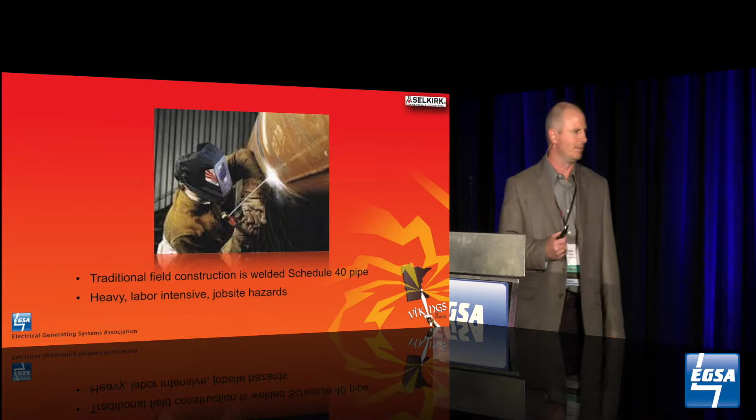So kicking into this, if you're not familiar with our product, we're at the tail end of the system. Here's my engineering humor again, but we're not depressed about it. So typically, exhaust systems, this is at the very end, the tail end, is a heavy Schedule 40 carbon steel pipe. Very common practice, been for years.

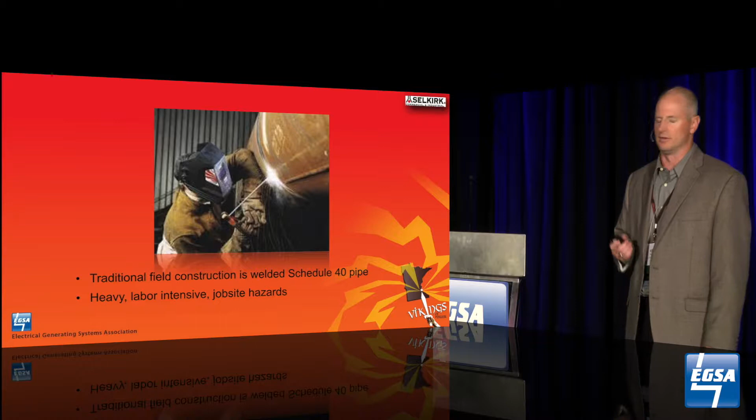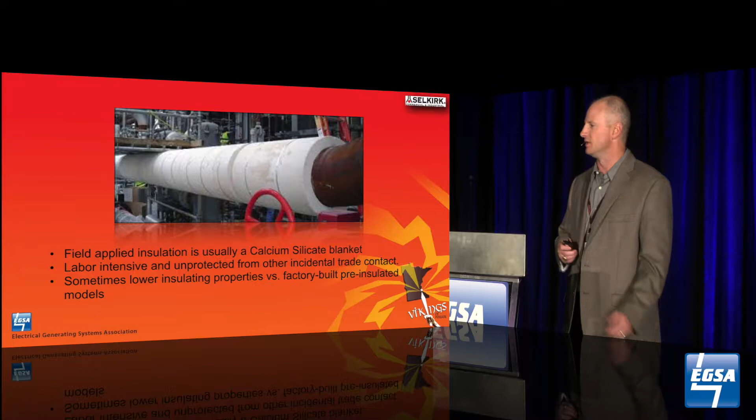But with that comes a lot of disadvantages. Field welding, for one, is a main concern. A lot of hazards can happen with that on job sites. Additionally, you've got field wrap, calcium silicate wrap. Does its purpose to some extent, but not overly protective of itself. Can also be an additional field, intense labor type of operation.

So when you look at some of the perspectives, the advantages are really just that it's a readily available system, carbon steel, Schedule 40 thick pipe, economical, readily available sizes. But there's a lot of disadvantages as compared to a UL listed system.

And the oxidizing environment that exhaust gases create, especially if it's an outdoor system like that one, those sulfur infused fuels will eventually corrode that out, especially outside. So you have larger clearances to combustibles.

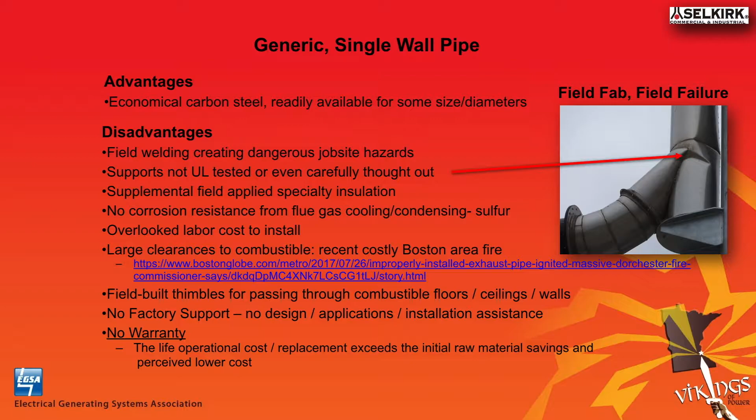Case in point, earlier this year there was a Boston fire that happened. They were on site, again, welding. Well, part of it was welding, part of it was just not keeping clearances to a backup generator for a building. Thankfully there was no injuries. It was not occupied yet, but it actually caused quite a bit of damage to this given building because the clearances were not taken into consideration on the single wall.

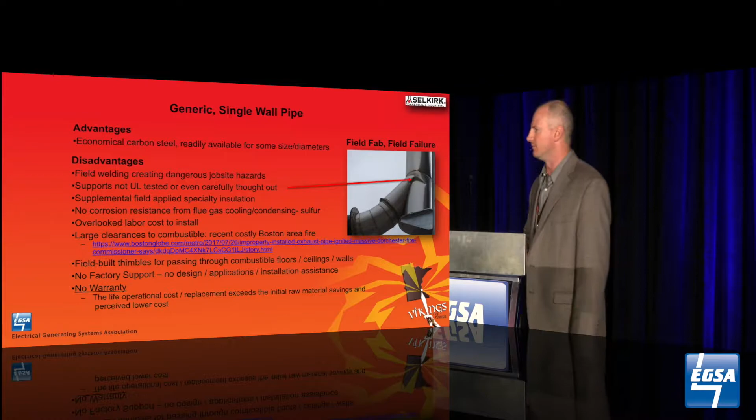No field-built thimbles, no factory support, and there's no warranty. So with UL-listed systems, we offer a full support program with that, design assistance, and then the overall life expectancy can be quite credible.

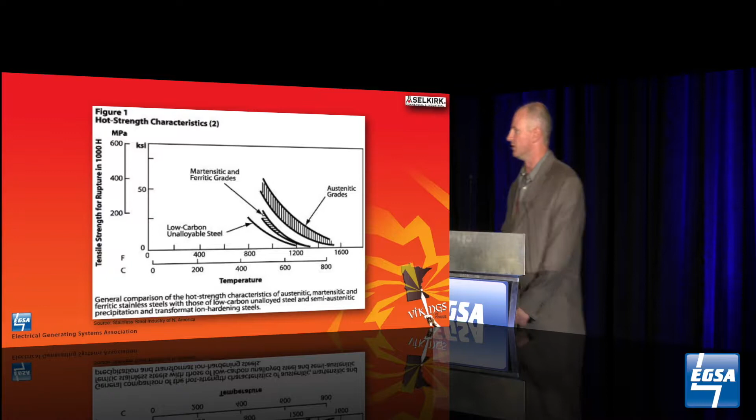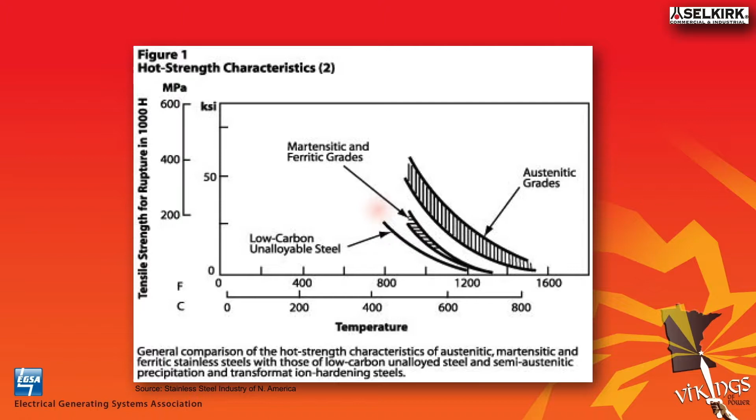When you look at the hot strength characteristics of carbon steel versus stainless steel, which is what you'll find out soon enough are the factory-built systems, there's almost double the tensile strength with austenitic stainless steels versus low carbon steels at the higher temperatures, anywhere from 800 to 1,000 degrees Fahrenheit, or even up to 1,200 on some of the gen sets.

A little quick ad. We did pros and cons, of course. Just going through some of the bullet points: stainless steel, pre-insulated, durable, credible, clean look. Life goes on.

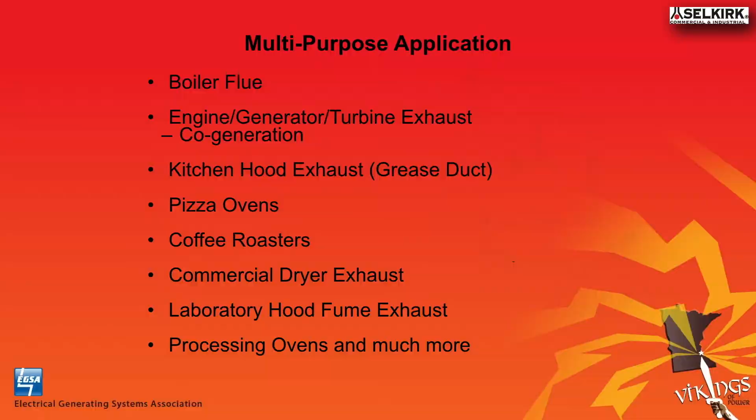So where this all came from, UL listed systems originally started out with boiler flue back in the early 70s, aka pressure stacks, and then eventually evolved into use on generator exhaust, turbines, eventually even into kitchen hood, grease duct world, pizza ovens, and the list goes on and on that we get uses for.

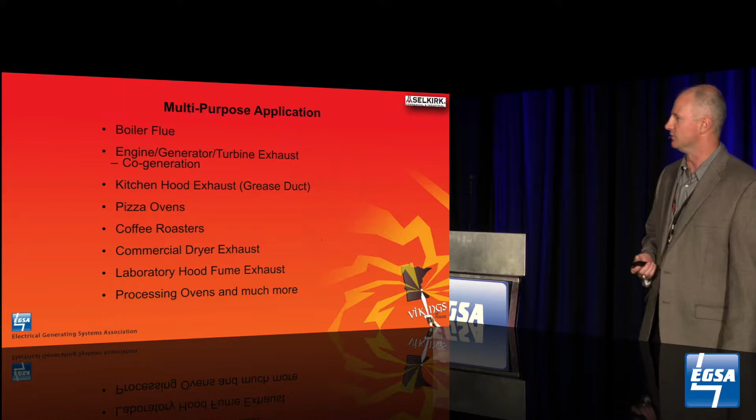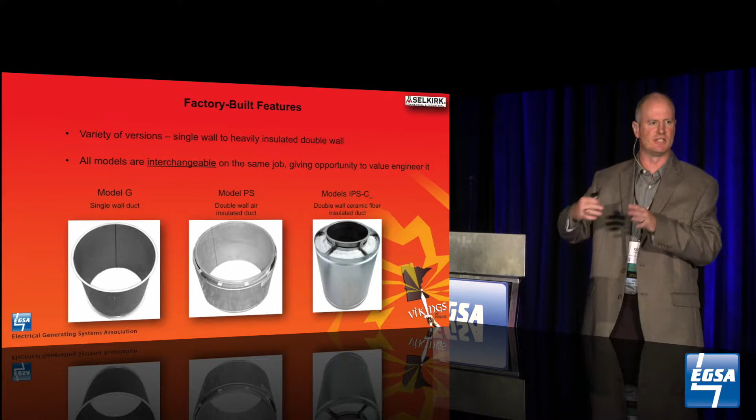We have a variety of options, starting with single wall to a handful of different double wall options. Again, all pre-insulated, stainless steel. The models are interchangeable, so you can start with one particular style in one area and maybe increase the insulation in another area in a building if you've got more concern with safety and clearances.

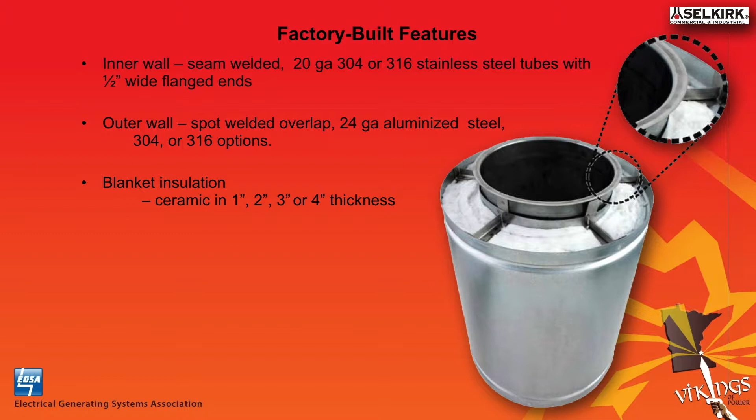So getting back to the guts of these systems, they're 20 gauge stainless steel. We usually use a 304 or 316 grade. Outer walls are usually anywhere from a 24 gauge aluminized steel, which is kind of like a galvanized look. It's paintable, and then there's a 304, 316 option as well. And then the blanket options are anywhere from 1 inch blanket all the way out to 4 inch.

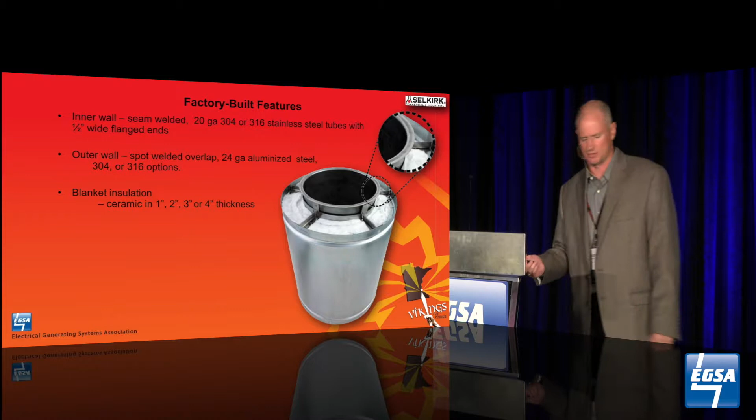Typical joint assembly, as I said earlier, is modular. These are a band and caulk type of system. So various lengths, various fittings, elbows, T's. Basically, you put the high temperature caulk in there, and then that holds a 60-inch water column pressure, suitable for the generator back pressures that we see in the industry today. And then you close the joint up with the trim pieces and insulation if necessary.

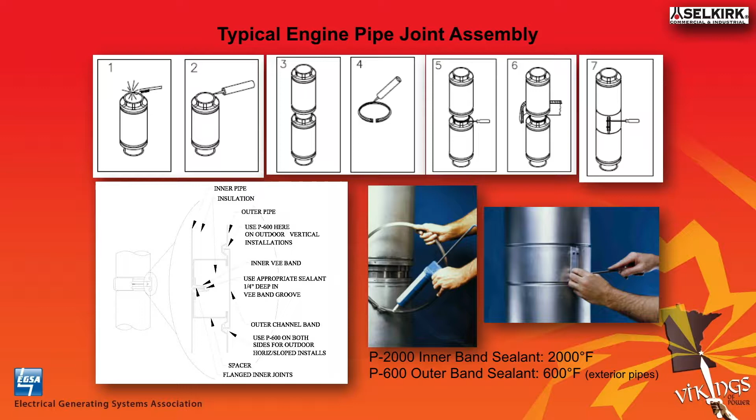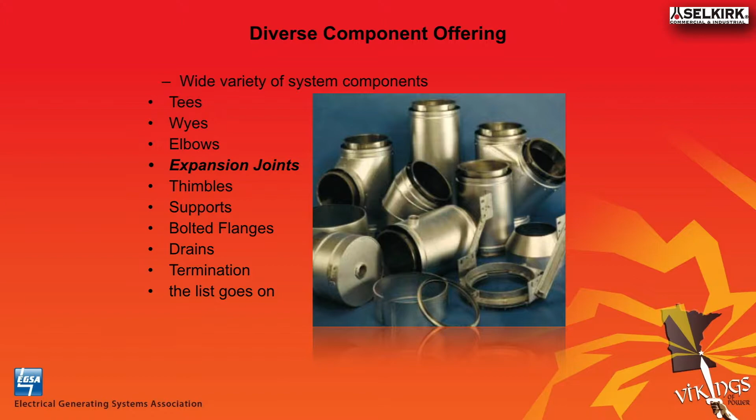The fittings we said earlier, T's, Y's, expansion joints. We use bellows joints for our thermal expansion components between fixed points, and then we get all the other components, starting with bolted assemblies, bolted flanges, starter pieces, all the way to the termination, and then wall and roof thimbles.

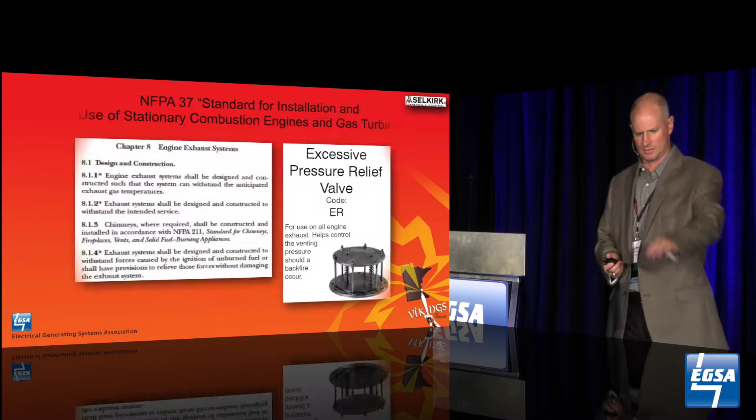Some of the components, looking at some of the guts, these kind of all derive off of NFPA 37 as far as some of the requirements or suggested requirements. One of the things we usually recommend on our systems is an ER relief valve, for unburned fuel potential especially in natural gas settings. So we highly recommend those systems on our product.

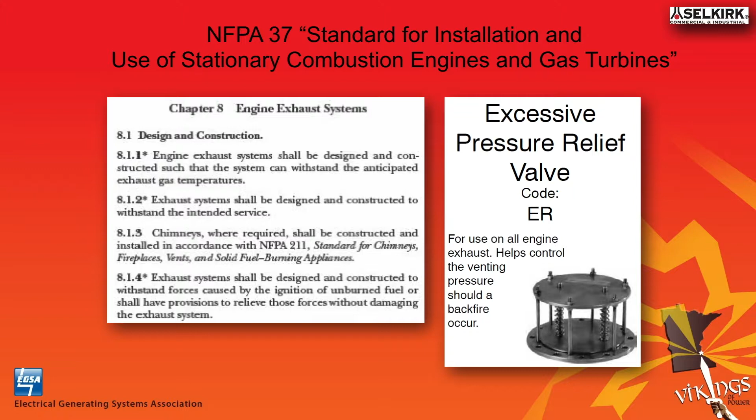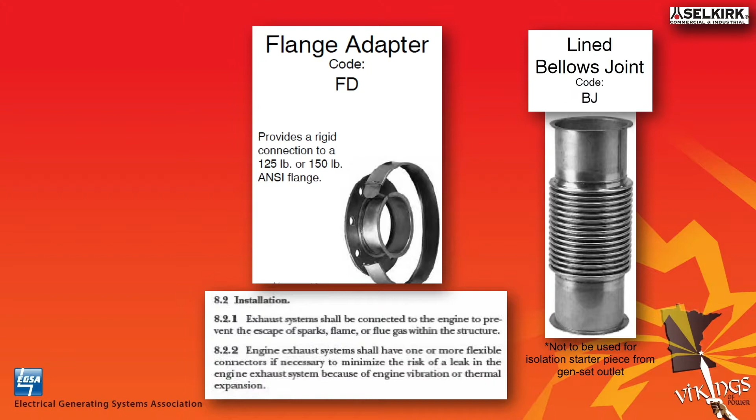And then we get on to some of the other starter components: a bolted flange connector starting piece, a bellows joint. Now the bellows, as I said earlier, these are a thermal compression device, a thermal expansion component. These are not your vibration isolation components that usually start off from the generator.

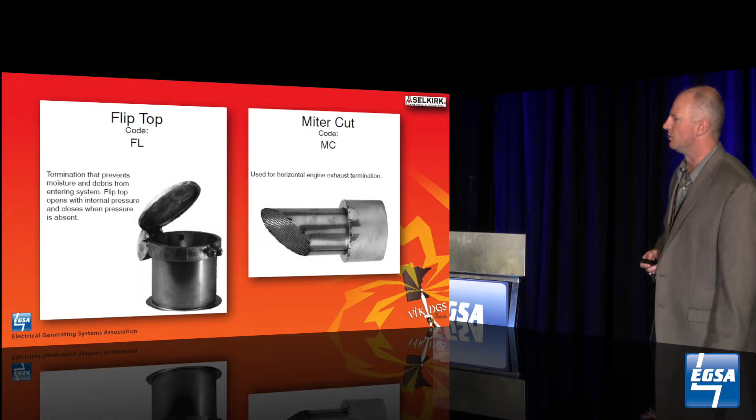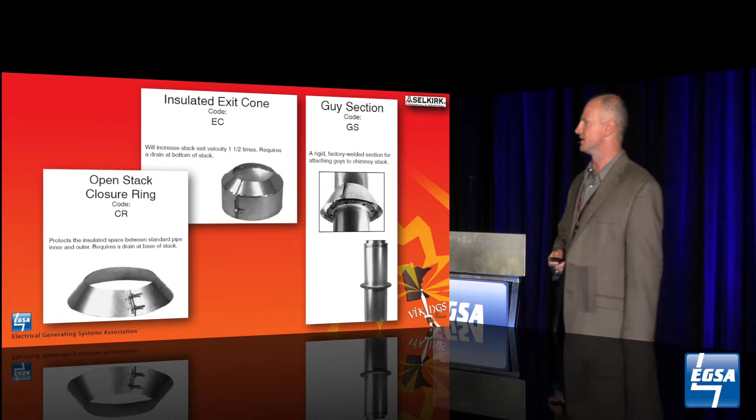And then we get into thimbles, roof flashings as such, terminations, the old tractor flip top, miter cut wall termination, exit cones if you've got to speed up velocity. We've got guy section requirements, or guy section ability if we need to go to a taller stack.

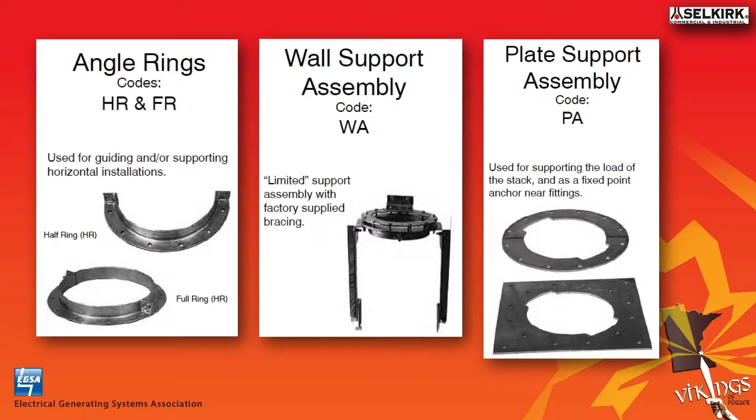All of our supports, we've got UL listed components such as saddles, wall supports, plate supports, anything to anchor it down to the building. But again, very modular, no welding on site.

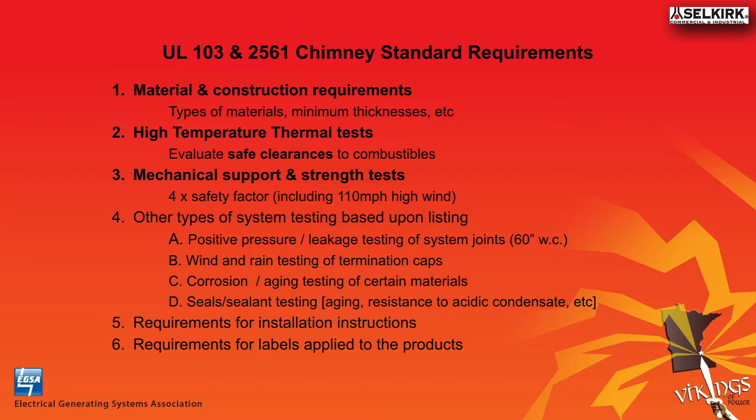So some overview on what the UL tests are. UL 103 is a chimney standard, goes up to 1,000 degrees, and then 2561 is a 1,400 degree chimney standard. Every one of those UL standards looks at materials of construction and evaluates the safe clearances based on any given model that we have.

Mechanical strength and support test, so up to 4 times the support load that we have to publish. We even do a 110 mile an hour wind test, which for the given environment that we've seen in the last few weeks is quite appropriate. And then other tests, positive pressure tests, corrosion tests, and such, and then our installation instructions and UL labels.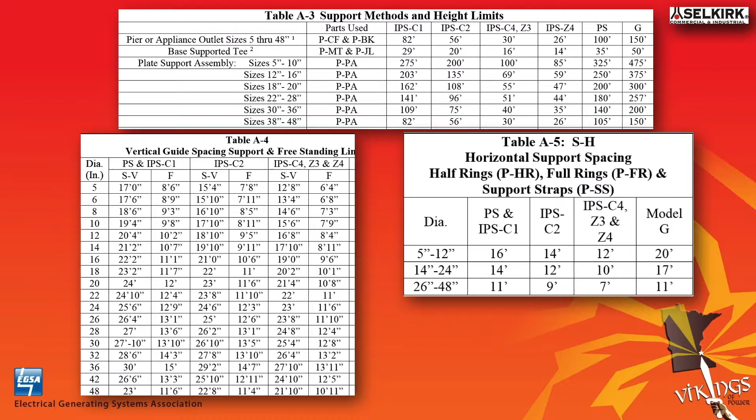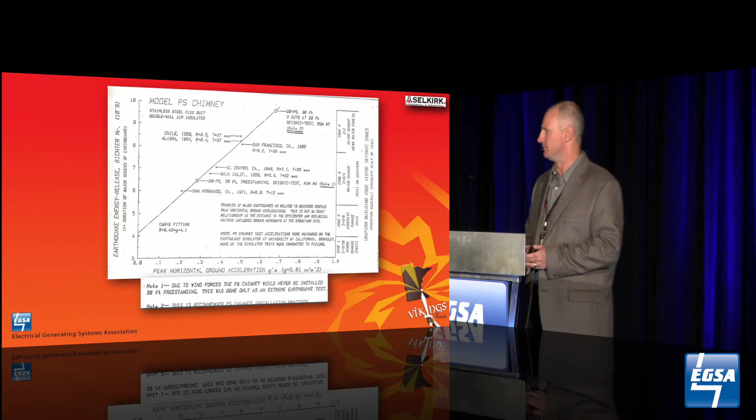And then you've got some freestanding heights that we have, anywhere up to 15 feet of freestanding above a lower support, and then guides. We've even done seismic testing. This chart's a little bit dated. I need to refresh that with my colleague Robert at some point in the future.

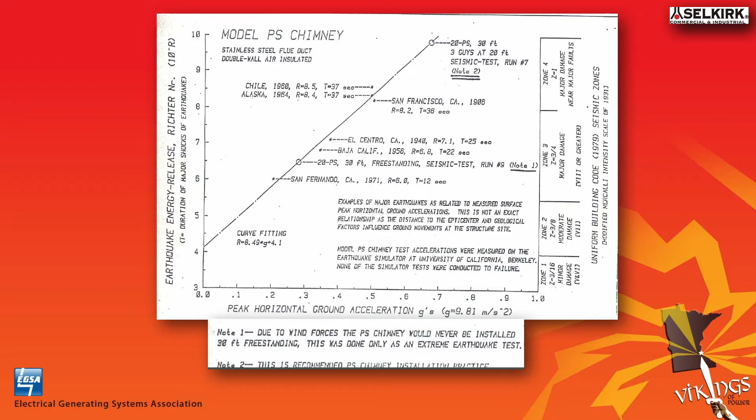This actually goes back quite a bit, but we put this in a laboratory out in California and did 30 feet of pipe and put it to the 10.0 Richter scale, and had data to provide that it withstood that, didn't fall down, didn't collapse, kind of shake and bake so to speak, and did well. So we've done data on that.

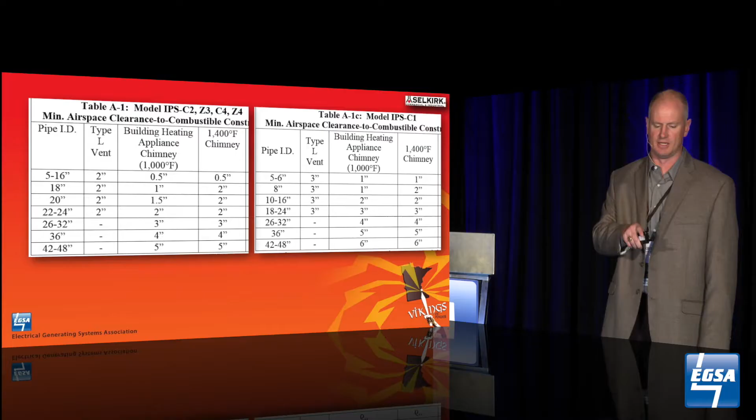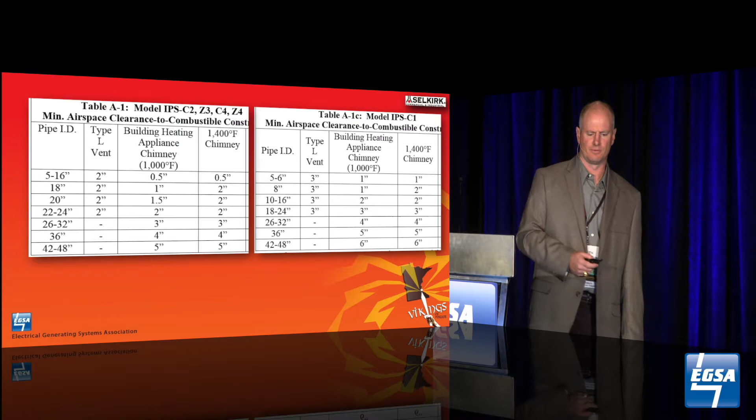And then you get into clearances. We've got clearances on our 2-inch blanket model down to a 1/2-inch airspace clearance to the outer wall, so very tight clearances for a given building. Depending on what model you choose, the clearances go up, and of course what size. As you can see on the chart, we start at 5-inch ID and go all the way up to 48-inch ID, so big stuff.

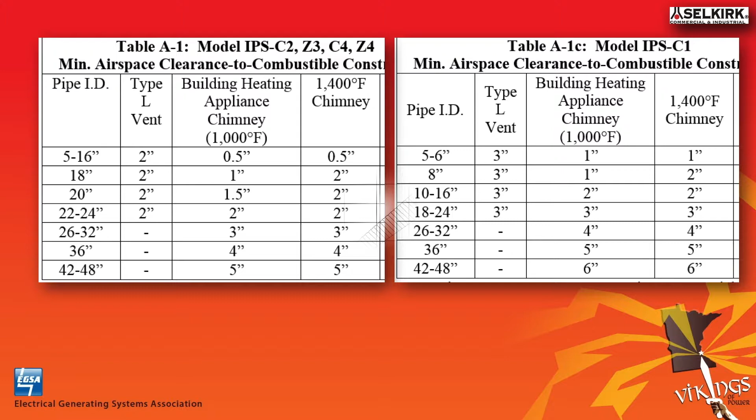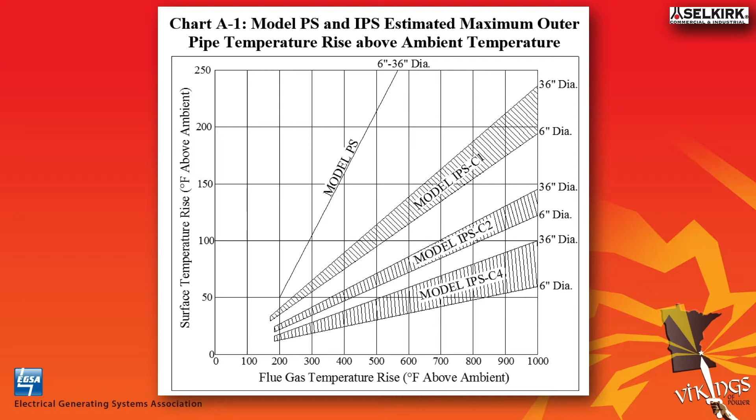And then your skin temperature is reflective of that. On average, if you go with one of our more common diameters and models, you'll be probably about 100 degrees above ambient. We do have thicker insulated product that'll get your skin temperatures down even more. But in the usual case, we stick with about our 2-inch blanket model or the 4-inch.

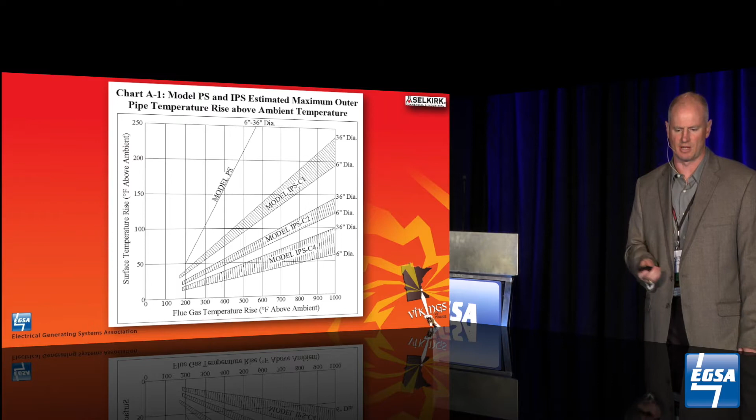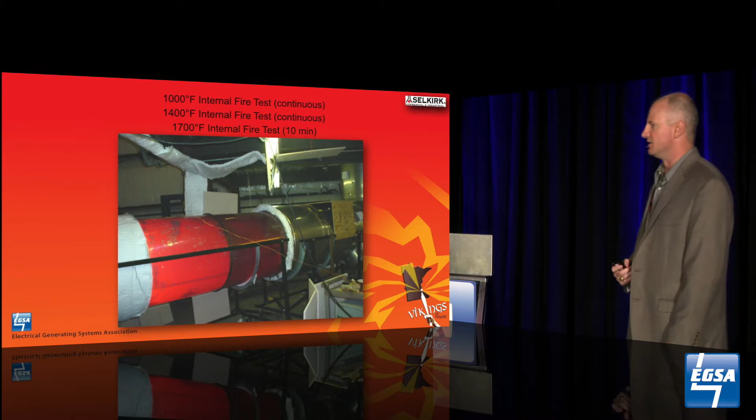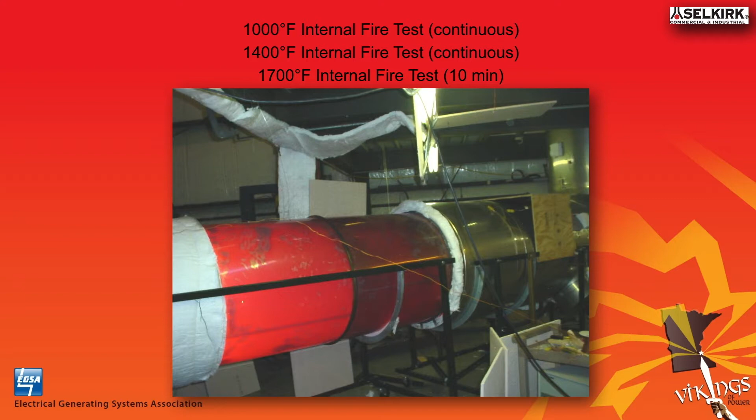I always like these shots here. This is kind of a testing lab environment. We get to fire this thing up to 1,000 degrees, then 1,400 degrees, and up to 1,700 degrees. In some other applications we actually have to go to 2,000 degrees for 30 minutes. I don't have that picture here, but it's neat to see the stainless steel become a little translucent once it gets to those temperatures. At a 2,000 degree setting, you can actually see shadows behind the other side of that pipe because it's glowing white. It's a neat aspect of putting heat to something.

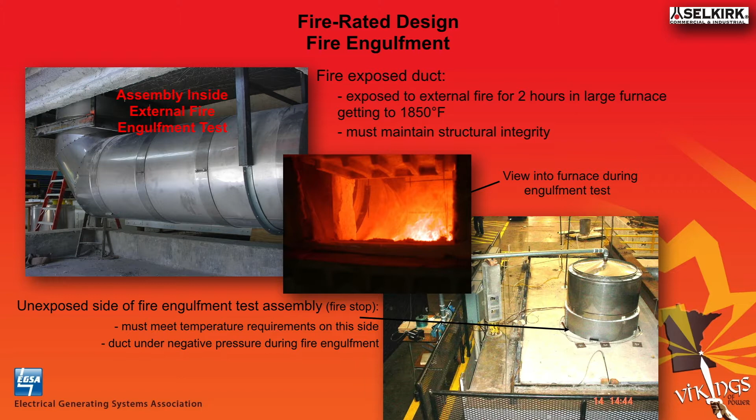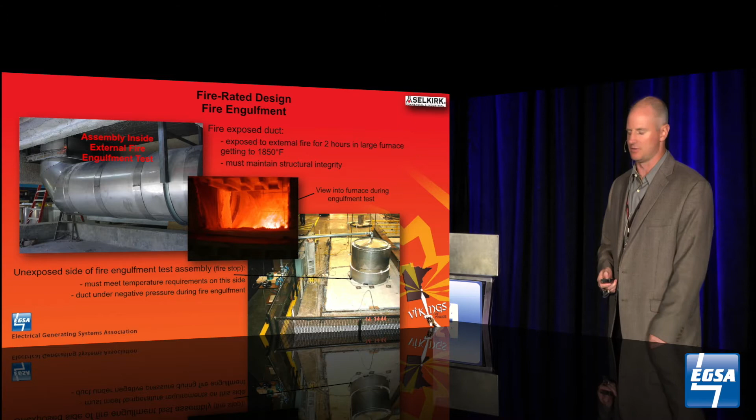So this is a fire rated model that we have. Anything that needs an hourly rating - you may not be overly familiar with that, but when you get inside the building and have to deal with the architectural and code officials, and have to break through fire rated walls and floors, we have a model specific for that. This thing gets dropped into a big tiki torch oven, so to speak, and gets engulfed in flames for up to 2 hours, and we've got to meet criteria on the outside of that. Another fun test to watch.

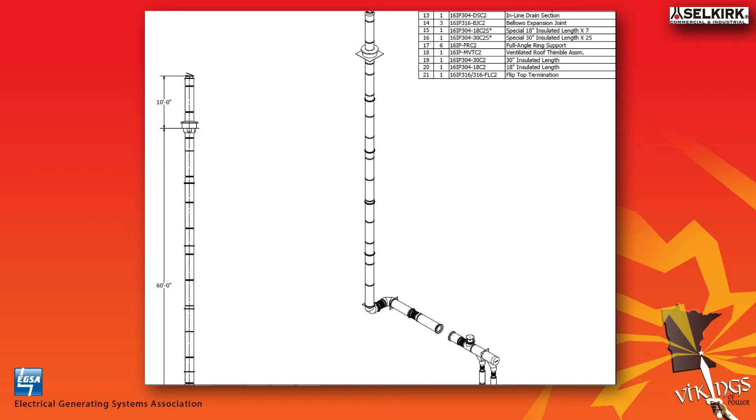We do modeling, 3D modeling CAD, putting the components into a system. This happens to be a twin outlet generator, with the silencer intermediate there in the horizontal, and then up the stack we go. This happened to be a 70-foot tall stack, up the side of or inside of a building, because we have a roof thimble on that one. So we do models for that, and we even tag them with parts. We can do BIM modeling for anybody that's a little more progressive in the building architectural world, for interference fit.

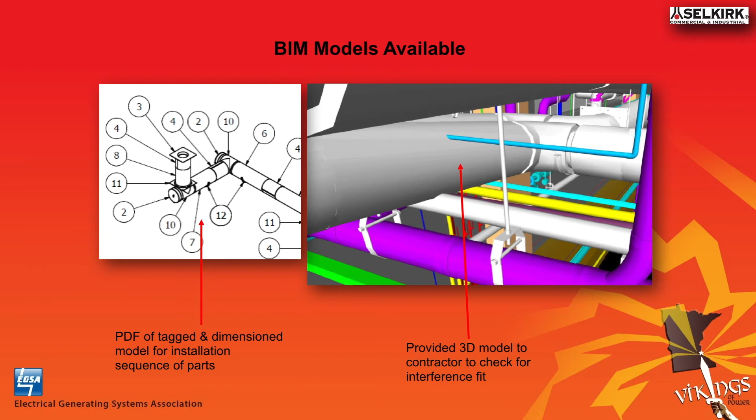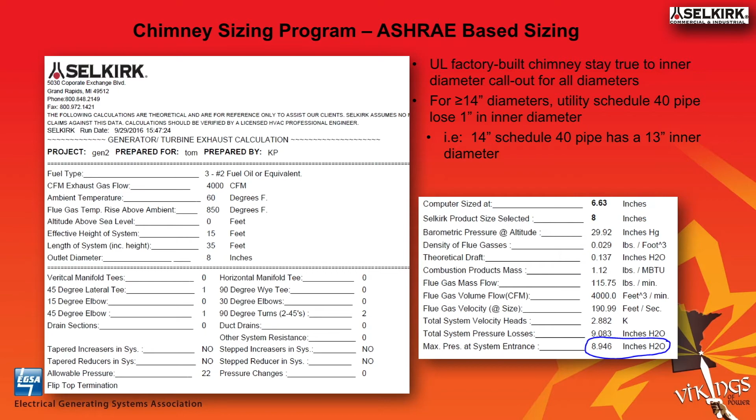And then we get into sizing. We have a sizing program, and we do our whole back pressure calculations. As long as we have the generator data - usually flue temperature and CFM allowance - and all of our routing of pipe, length, height, fittings, and all that, we plug that in and plug and chug. This happens to have a 9-inch back pressure for this particular system that we did here.

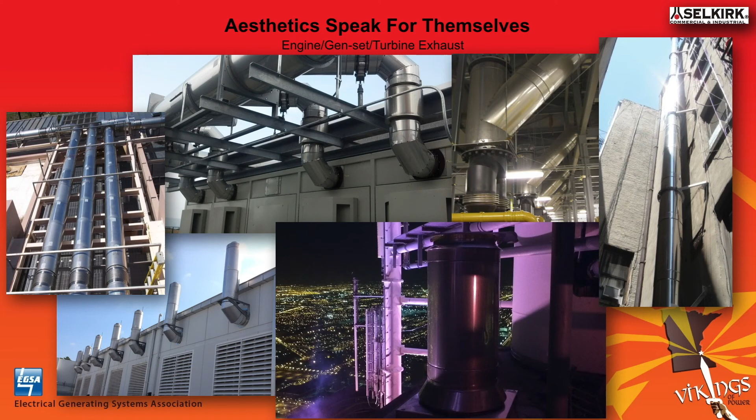Last but not least is the aesthetics, the clean look that you get with a double wall metal system - stainless inside and then stainless options out, or galvanized out that's paintable. One of my favorite pictures is the one on the lower there, the skyline at night. It happens to be the top of Willis Tower, Sears Tower, overlooking Chicago West. I did not take that picture, thankfully, but somebody else did and gave it to me.